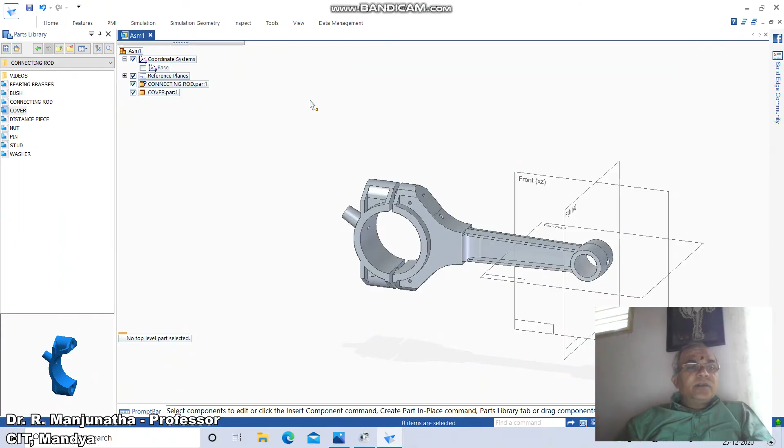So once you do that, now we will go for the next part, which is going to be the distance piece. You just double click on the distance piece. So go to home, click on assemble. You just lock the rotation here. You just click on this axis or the cylindrical portion of this with reference to the cylindrical portion of this.

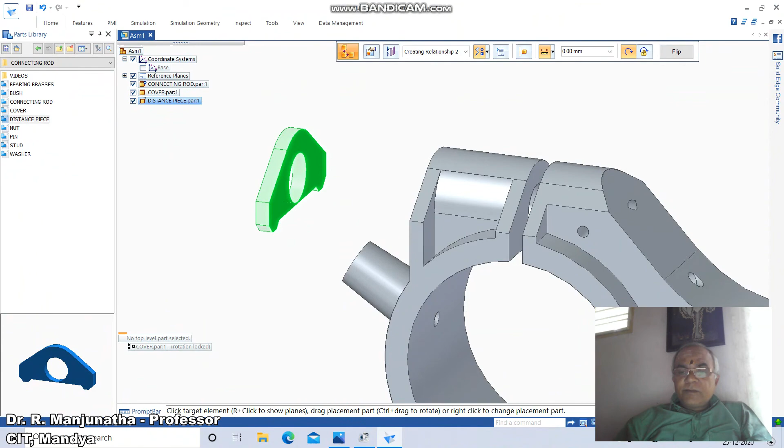So then you just drag this, go to home, drag component. Okay, you bring it nearer to the working area. You just bring it to this and go to home. Click on assemble, click on this face with reference to this face. Now this has been placed. Then we will go for the stud. You just double click on stud.

So go to home, click on assemble. So now don't lock the rotation, you just click on the cylindrical face or axis of this with reference to the axis of this. Now if you drag the component out, this will rotate only with reference to this. So now we need to align the axis.

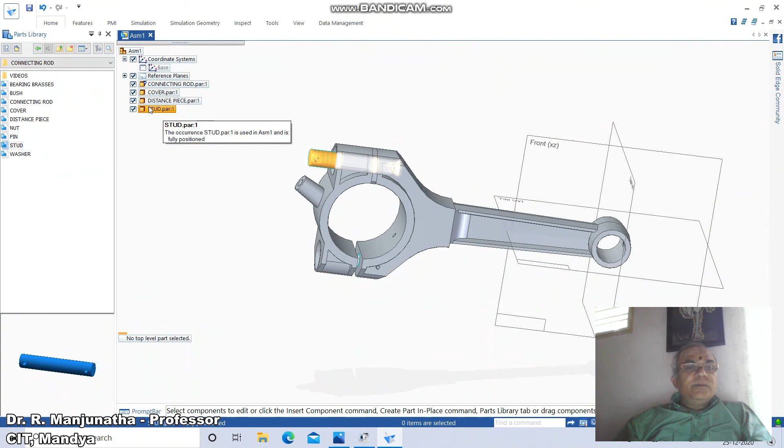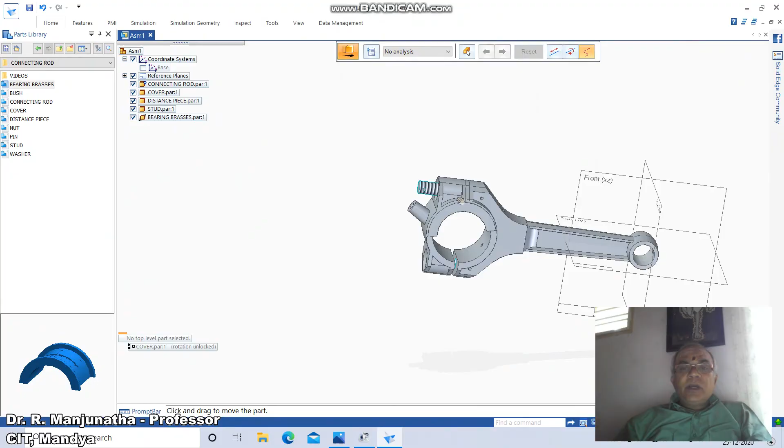You just click on the bearing brass, then go to home, click on assemble, click on flush fit, click on the axis of this, don't lock the rotation, to the axis of this. So go to home and go to drag component. Okay, so as I drag this, you can see here it is moving. Then I'll go to zoom area and I will try to lock this now. You just go to rotation.

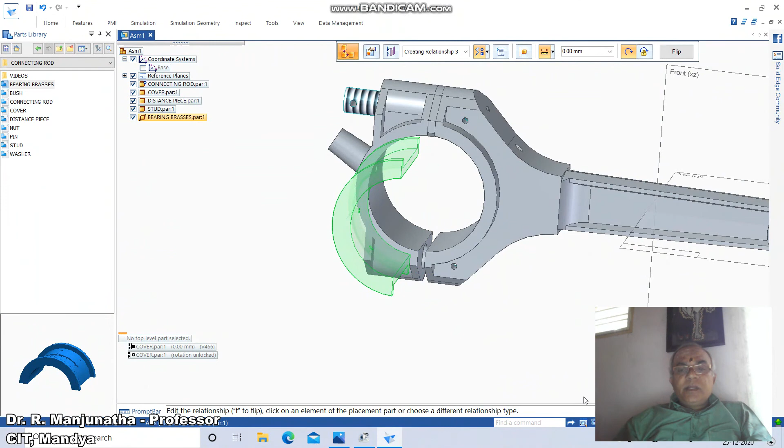So then go to home, click on assemble, click on this feature with reference to this feature. Then again you just rotate it and go to home, click on assemble. So click on this face with reference to this face. So now we can see this has been placed exactly at the center. So I need to move this.

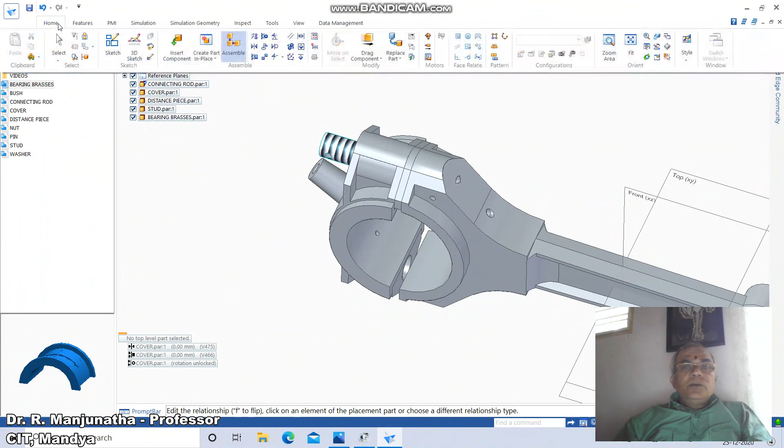To do that, again I will go for home, go to assemble, or you will just go to home, click on mirror copy feature. So these are all the mirror options. You just go to mirror components, click on the components to be mirrored. So I want to mirror this bearing brass. You just click on the bearing brass. Okay, click on the assembly reference plane to be mirrored about.

So I need to create the mirror plane. To do that, first go to home, click on mirror plane to be created. So to create that, I will just go here, click on parallel plane. So you just click on this and create it at 1.5 mm, because the distance piece gap is only 3 mm. So we have created this.

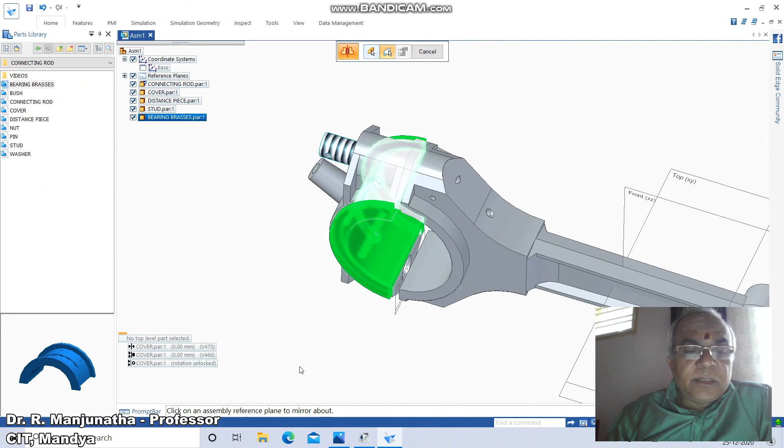Then go to home, click on mirror copy, mirror, click on the components to be mirrored. I want to click on bearing brasses, and I will say OK. Then click on the assembly reference plane to be mirrored about with reference to this, and I will say OK, and then say finish. So now we have finished this one. Now again I need to mirror all these things with reference to this.

So to do that, first we'll go for the nut. Take the nut, you just double click on the nut. Then come down to home, click on assemble. So now we can go to drag the component and take the component nearer to this. Then go to zoom window.

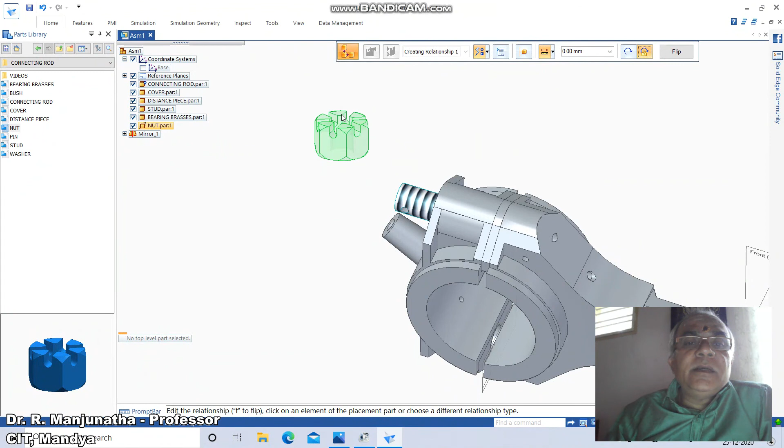So here you just go to home, click on assemble, click on flush fit, click on lock the rotation. You can lock this, no problem. So you take the assembly of this with reference to this. Then you just go to rotation, or we need to create the washer. Yes, we need to create the washer.

So here I'll just go to this and go to nut, and you remove this nut. I will delete this. So now we'll go for washer. You double click on washer and then go to home, click on drag component, click on OK and bring it near to the screen.

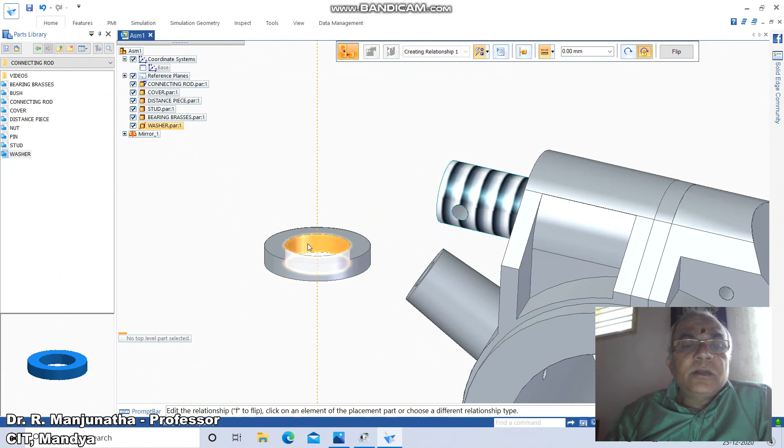Then go to zoom window, go to home, click on assemble, lock the rotation, click on this with reference to this. Then you just rotate this. Then go to home, click on assemble, click on this plane with reference to this. So now we have placed it.

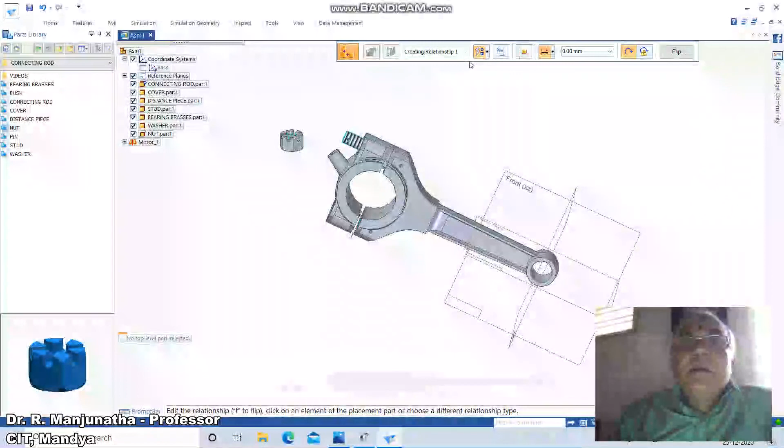Again go to nut. So go to home, click on assemble, go to flush fit, click on the axis of this with reference to the axis of this. Then you go to home, assemble, click on this face with reference to this face.

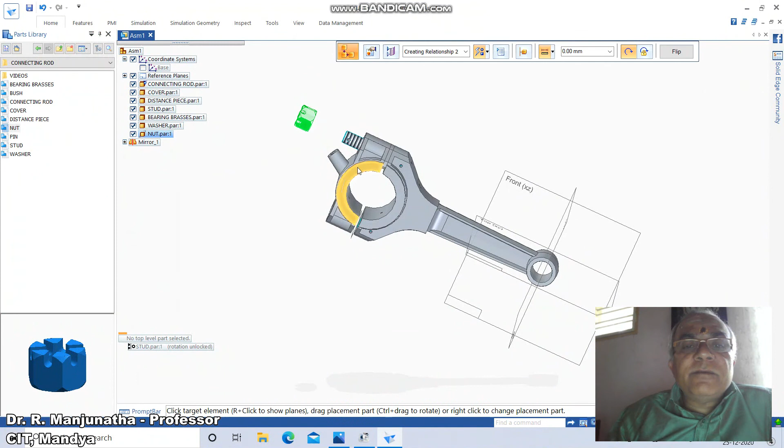You just rotate that. Now you just come down to this zoom window, go to home, assemble, click on this face with reference to this, so that it will make the way for the pin to be placed here. So this is the advantage you will get when you are not locking the rotation. You can see that the pin can go inside directly. So this is the advantage we are considering now.

Now to do that, again we need to go for the pin. So you just go to pin, double click on pin, and go to home, go to drag component, click on OK. So now you drag this and bring it near to the screen. Then go to zoom window, go to home, click on assemble.

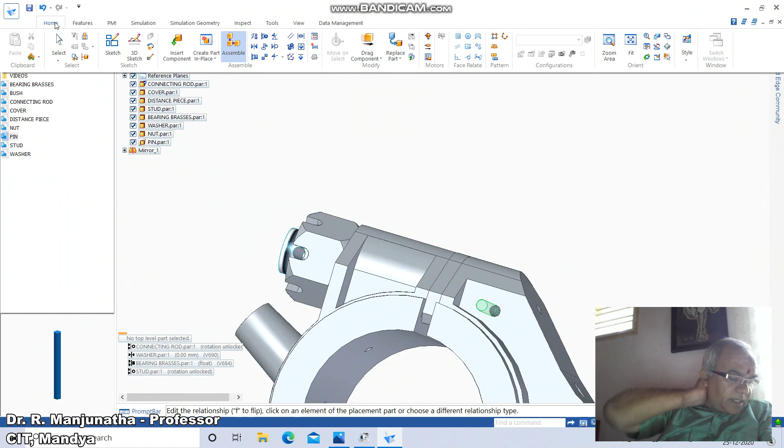So go to flush fit, click on this axis with reference to this, and then again you just go to home. So the 24 mm width of this will be here on this pin, which is going to be 20. So here assemble, go to flush fit, click on this face with reference to this. So now it has gone inside.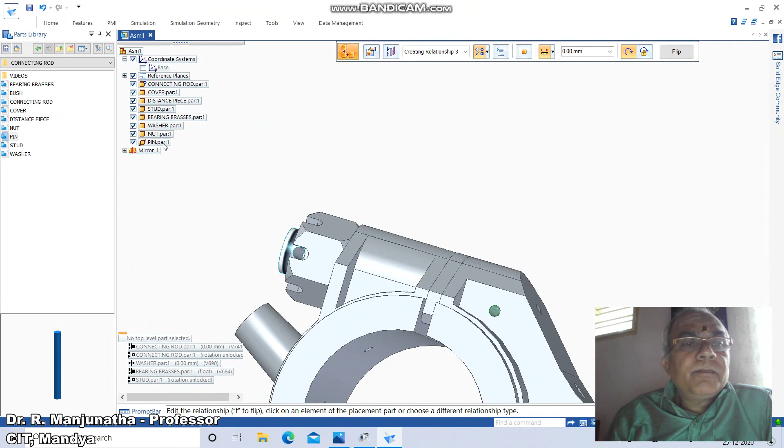So you just give the pin distance, so here lock the rotation and then give the distance as 2 mm. So here if you come down to the top, can we see that? No, it's not there. You just go to home, go to pin, and you just delete this pin. Then go to ISO mode.

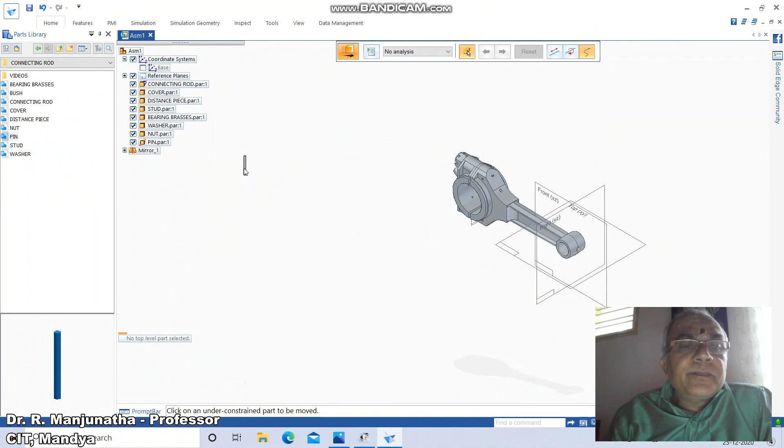Now you just double click on pin. Now go to home, drag component, okay, and take this pin nearer to this, then zoom window, then go to home, click on assemble, click on lock rotation, click on this axis with reference to this axis, then zoom window, then go to home, click on assemble, click on flush fit. So take this face with reference to this.

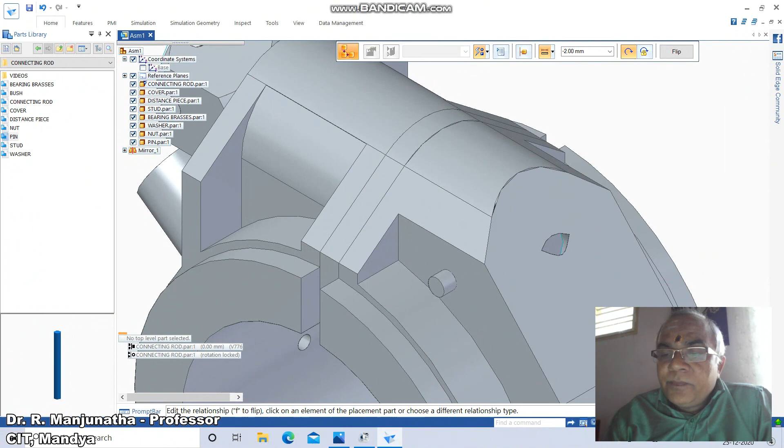Now you just give 2 mm on this or -2 on this. So here if you give -2, when you take the top, or the bottom plane, you can see there is an equal amount protruding out. So this is how you will be able to place this pin here, and similarly it can be done on the other side. So now we will go for the components to be mirrored.

So go to home, click on components, which is mirror components. Which are the components you need to mirror? I will go for stud, then the distance piece, nut, washer, and also this pin, and I will say OK.

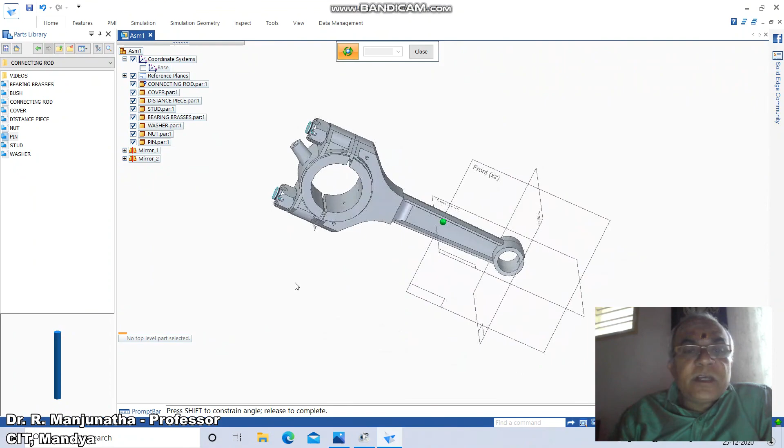Then the assembly reference is to be mirrored about this plane, and you say OK. So all these things are going to be mirrored, and say finish. So directly you can see here these components which have been mirrored along with the distance piece; everything has been done.

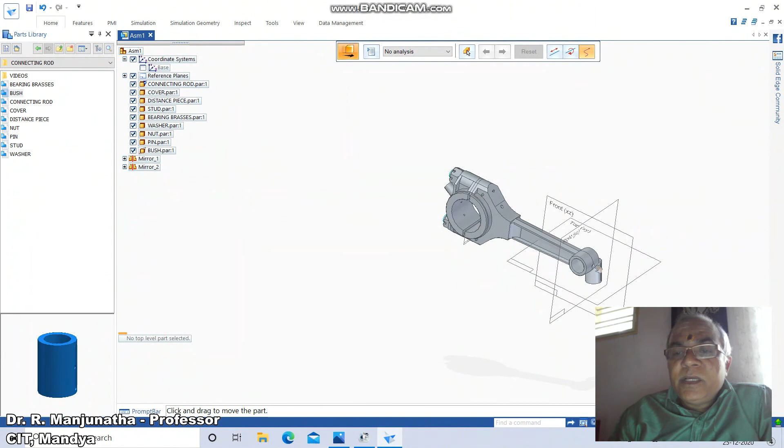Now we will go for the cover bush. So now we'll double click on this bush. So now the bush is going to appear here. So you just come down to home and drag the component. Okay. So you take this component nearer to this, and then go to zoom window, then you just go to rotate. You can see that this hole has to be aligned with this.

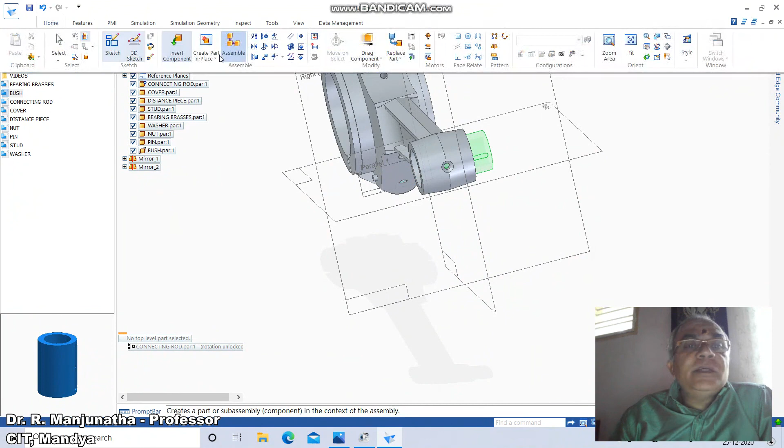So to do that, go to home, click on assemble, click on don't lock the rotation, and just click on this and also on this. So we'll go to place this. As I move this, drag the component, okay, it moves outside, then go to home, click on assemble, click on flush fit. So align this center with reference to this center. So now this automatically comes and matches with this. So this is how all the parts have been assembled now.

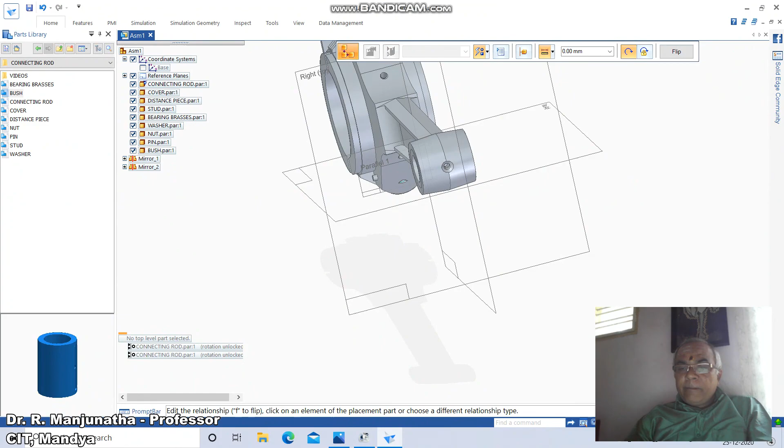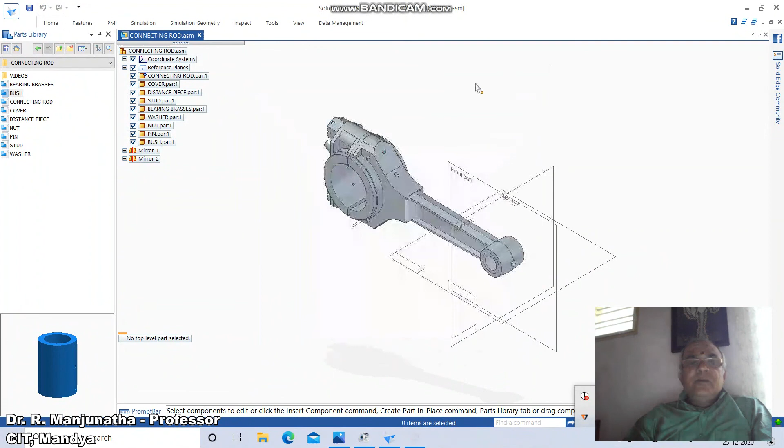So now we need to go for the isometric view. So we need to go for the final one. To do that, I will just go to save, click on connecting rod assembly. Now I will write the connecting rod. Now I'm going to save this. So once you save this, now we go for file. You just create a new one.

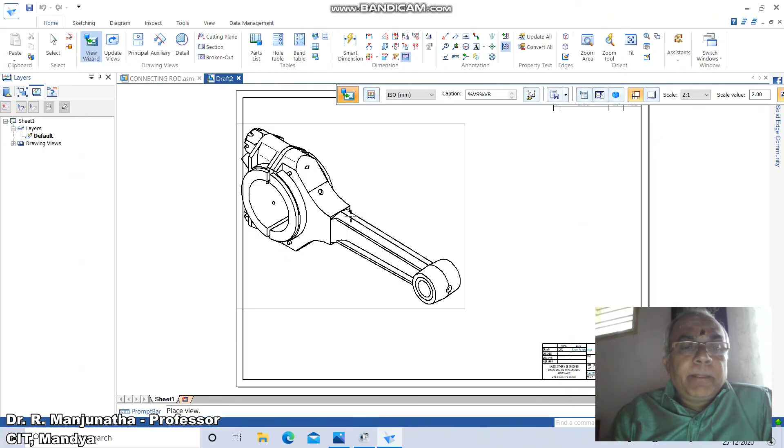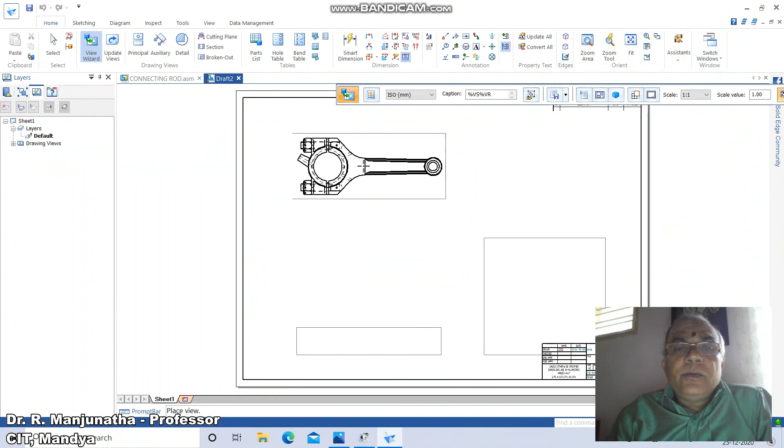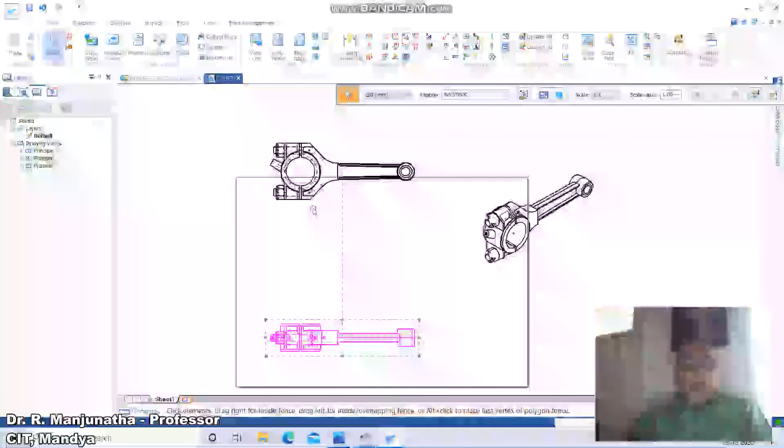So then you just drag this near to this, and you drag this near to this, and then go to sheet setup and make the sheet setup A3. Don't show the background. So you just drag these components and you keep it here, and you keep it here, and then you keep it here. So now we have all the three which have been placed.

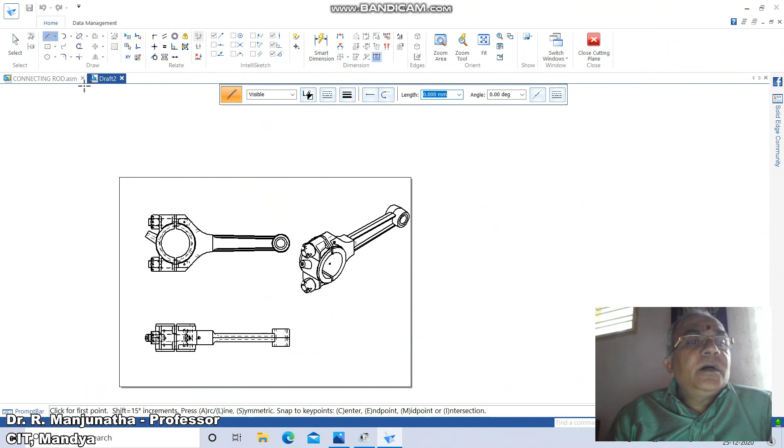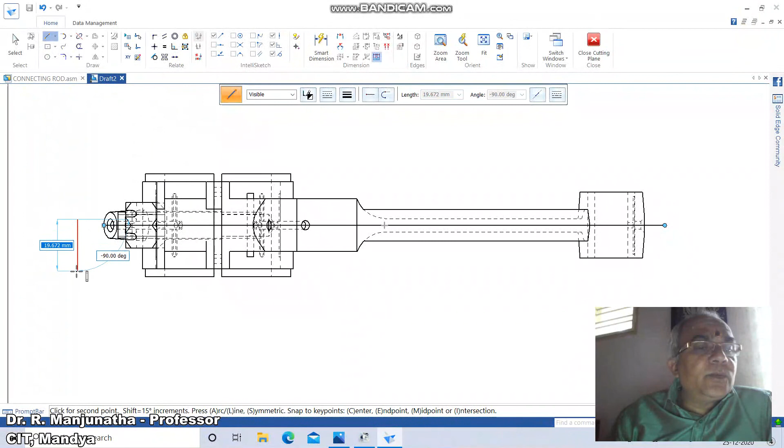Now the next part is I need to create the section. To create the section, we need to go to the cutting plane. So click on this. So we will go for this. Then you go to zoom area, then come down to line and take the center of this, or you take any center here which is possible to get. I am going to take this and take it out, then go to line and you just create one line here and go to trim corner between these two.

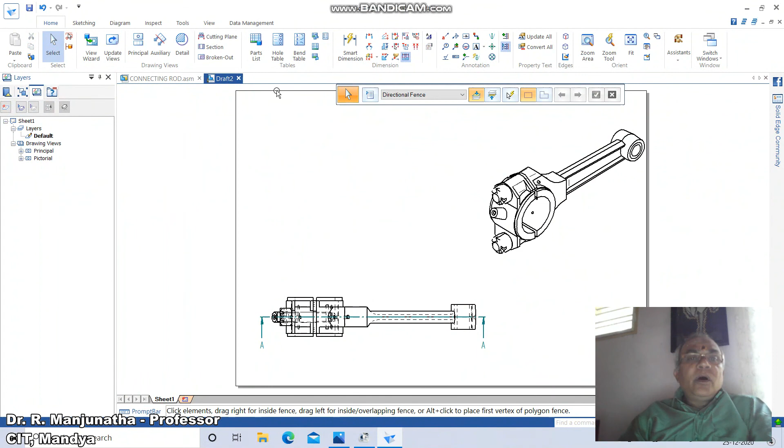So now we have this. Once you get this, you delete this and then you say close cutting plane. So you are going to get the cutting plane here. Once you get this, you just fit it. Now you just go to this and delete this portion, and now you go for section. So click on this cutting plane. So you are going to get the sectional view of this.

Then I need to go for bill of materials. You just go to part list, click on the drawing view, and then you just click over this. You will place this. You are going to get this component here. So we are able to get the assembly. Once you get this assembly, now we need to create the shaded portion.

You just click on this and you just go to this. You just click on this and take this shading object, shaded with edges. So you are going to go for update views. So you're going to get this option. So these are the parts which have been assembled.

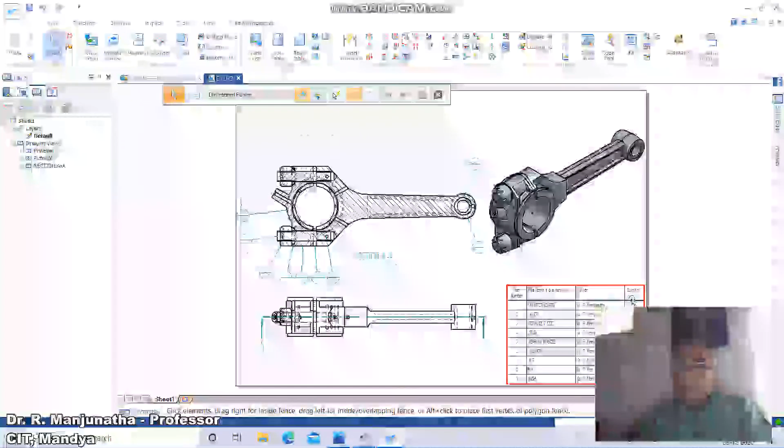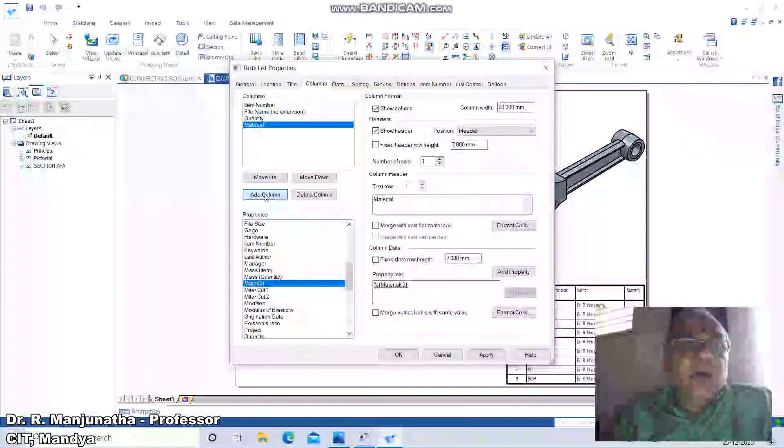Now we have the quantities there, but I need to have the material which has to be placed. So to do that, you just click on this, go to properties. So you come down to author and you delete this, delete column of this. Now I need to have material. So you come down to material and add column of material, and then you move up and then you say OK. So you're going to get the material here.

So this way we are able to create the connecting rod assembly, and along with that you are going to be able to create the 2D drawing and also the 3D model.